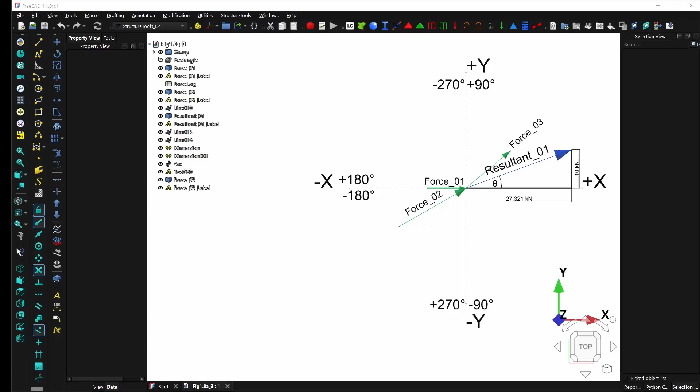It really is quite remarkable the amount of AI power that's available to the average person. The question is, what do you do with it all? You either contribute to something meaningful, like structural mechanics in FreeCAD, or you can turn yourself into the Terminator. I'm happy with my decision, don't judge me.

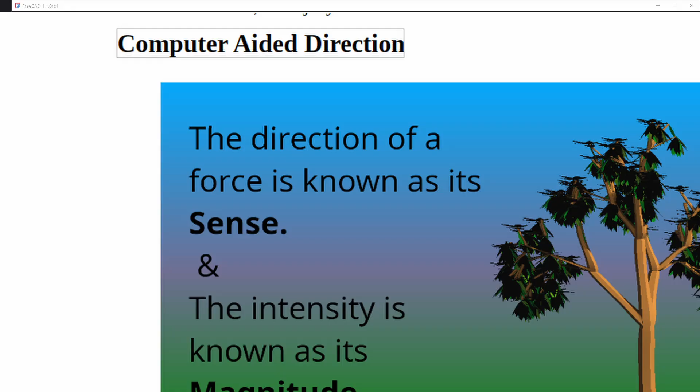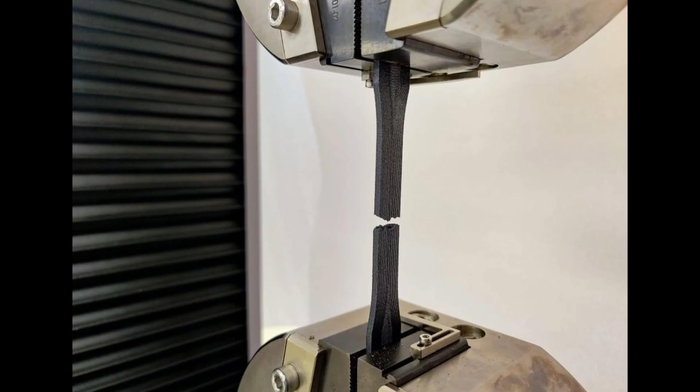Drafting or design? Technically, there's no upstream from design, but guess where the finger of blame lands if something goes wrong? The drafter's knowledge flows from design to manufacturing. So it's very important to be able to design before you accept the CAD position, or have a clear clarification of that 'D' word. We've all been there, right? Yeah, just keep making it stronger till it doesn't break. That's not computer aided design, that's computer aided destruction.

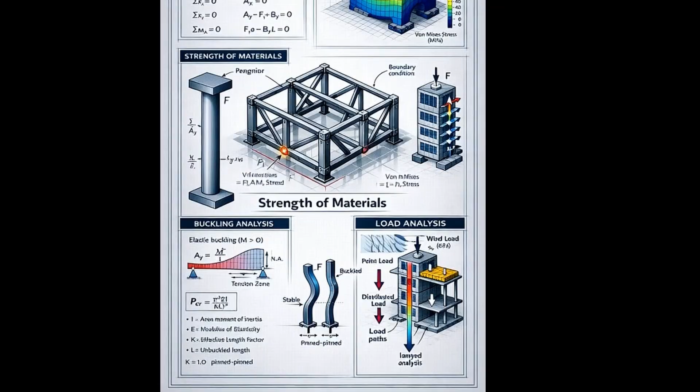When the economy of scale starts to include a risk to human life, or a significant amount of time and money expense for R&D, then a design needs to be implemented. Some people will still say it's form over function, and good luck to those people. Structural mechanics investigates function via a load analysis, the strength of materials, a finite element analysis, a buckling analysis, and Chapter 1: statics.

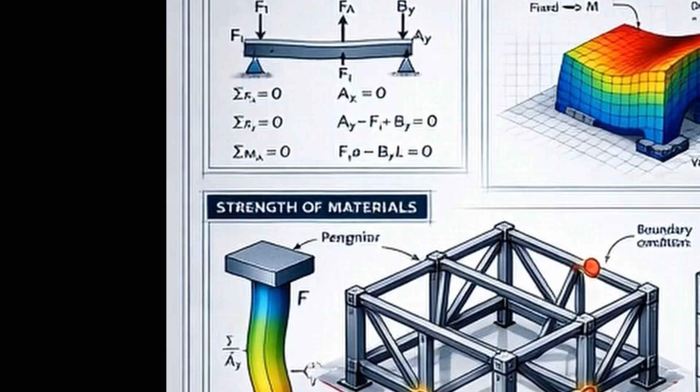When an engineering course starts, there's a 75% dropout rate, and even these lecturers aren't as focused as they should be, as there's good money to be made by betting on who's about to drop out and who's not. And without a decent library on these essential skills, the primary engineering subjects can be a little harder to learn than they should be.

If it's not moving, it's static. If an object is moving, it's dynamic. Typically, buildings are static. So let's go ahead and take a component out of a building, say a truss.

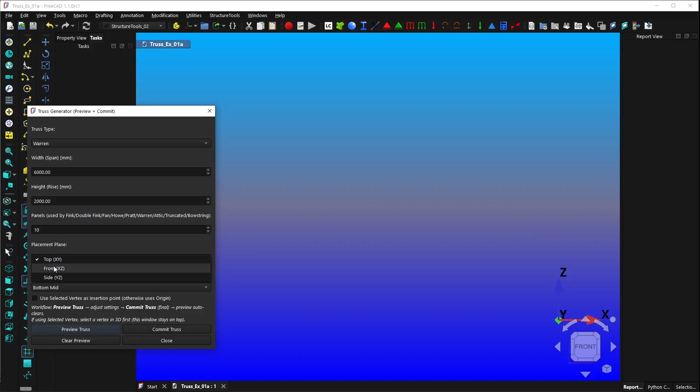With this macro that I've written with the help of AI, there's a list of different types of trusses that you can use. The span we're looking for isn't really that relevant at the moment. Neither is the height, neither is the members. But I do like to put it on the front, so we'll just preview this. Span of so many. Yep, that's better, and we'll commit that.

Close. And the beauty of this for analysis is that when it's drawn, each section or element is individual. There's no continuation between the nodes, and this is important in 2D analysis such as StructureTools.

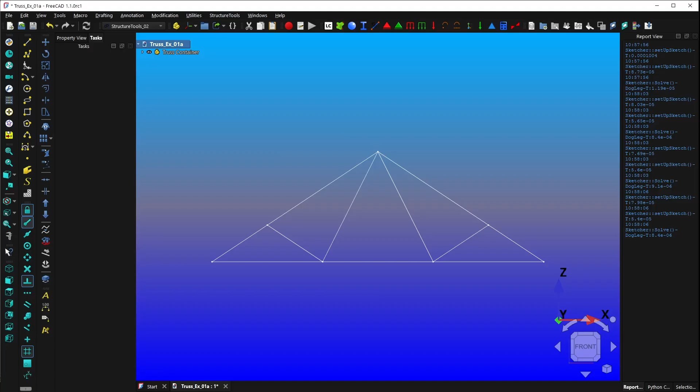Now the first thing we want to do, if we just switch over to - actually, I might just show you the example, it will be easier for me at least. So we have a load of 15 kilonewtons, and we can assume logically that each of the reactions is going to be equal, or spread out over the two places where the truss touches the walls or the supports. But in a case where...

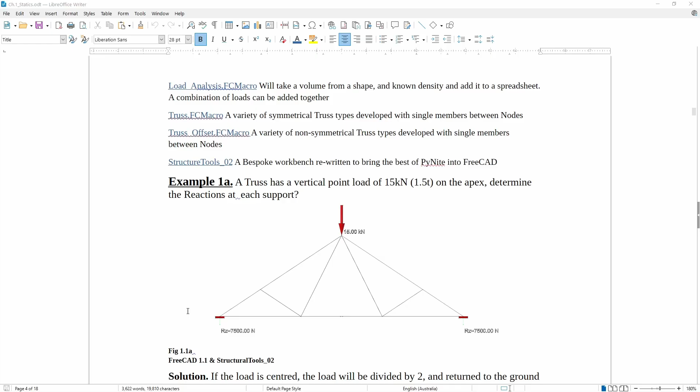a truss might have an offset loading, the reactions will be different. And as you can see from the workings here, you can determine the loading on the support either by proportionality, or a percentage of the load relative to the span. So if this is over 25% of the span, then this will take up 75% of the load, and this one will take up 25% of the load. So it's really quite convenient, but in no way the entirety of the subject of statics.

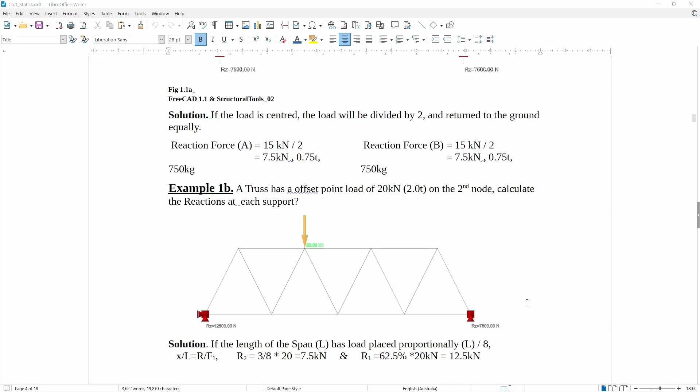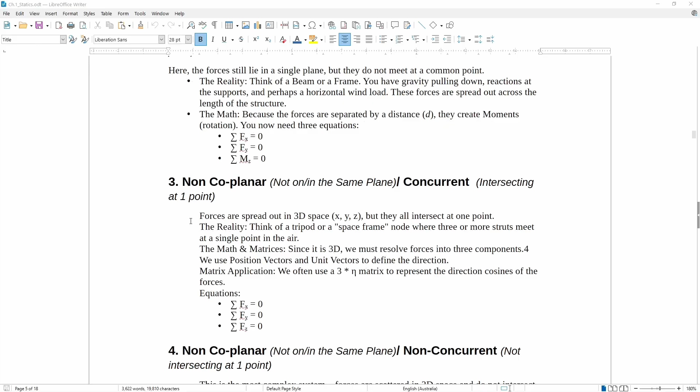It is quite complex, and there are 4 basic force systems: coplanar concurrent, coplanar non-concurrent, and these two are basically software: non-coplanar concurrent, non-coplanar non-concurrent. But without knowing these two in good detail, you really shouldn't be using software in the first place.

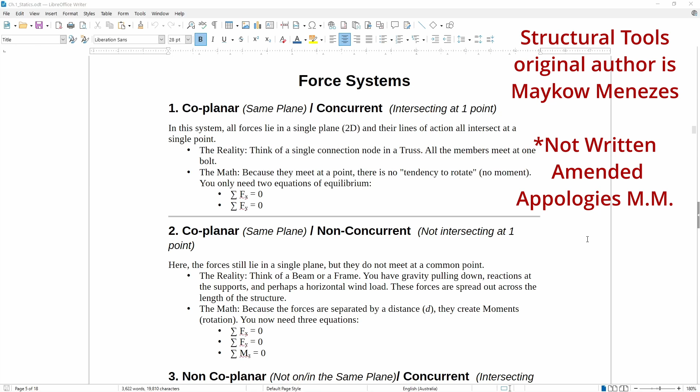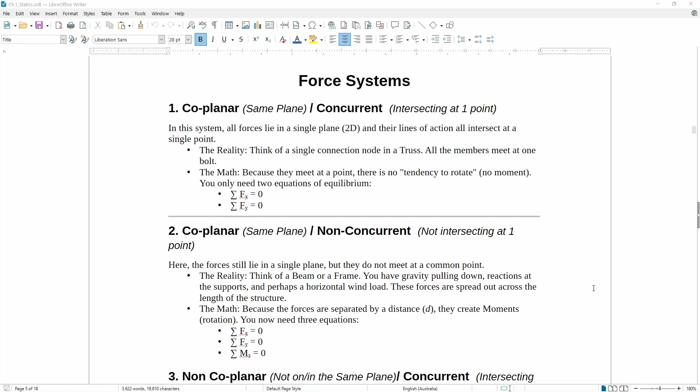So I've simplified this section with another macro, which I'm about to show you. But section 2, coplanar non-concurrent, it's all theory. And yes, StructureTools version 2, the one I've amended, does have the tools to do this kind of work. But should you do it before you've done hand calcs? Because the idea of using software is to confirm your calculations are correct or within ballpark, so you then have some confidence.

Coplanar concurrent force systems are simply a group of forces, so the green ones can be simplified into one force called the resultant, and it has a balancing force. So you can balance all these forces with one force.

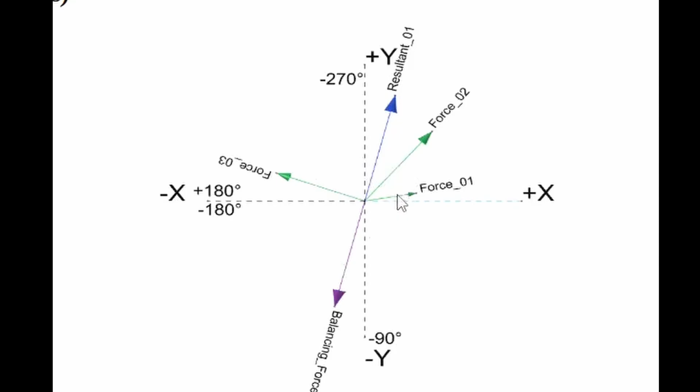I guess it's probably best to show you an example. Here's one I prepared earlier, but I'll switch over to FreeCAD.

Okay, so this is the macro, and if we use these forces, force 1 and put on the front plane, we want 10 kilonewtons, the angle is 45.

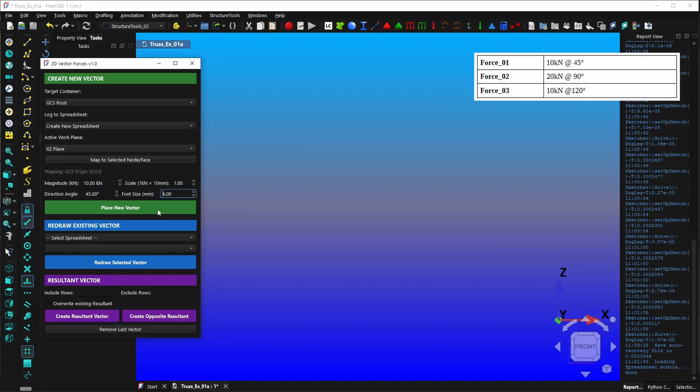Okay, so the scale is 1 kilonewton equals 10 millimeters. The font size, I have no idea, I can't remember. Let's have a look what happens.

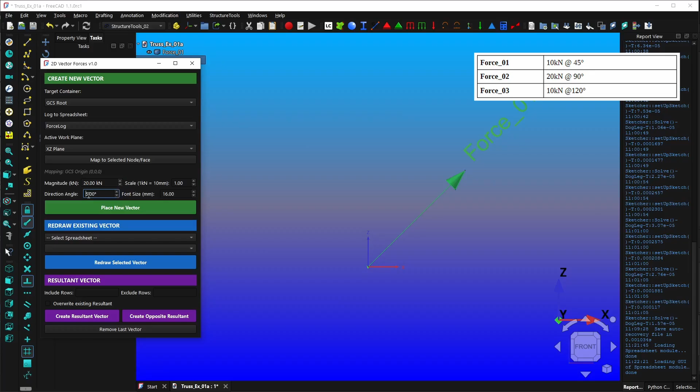Okay, I'll turn on the axes. And the second one is 20 kilonewtons at 90. So, 20, 90. There we go.

The third one is 10 kilonewtons at 120. Alright.

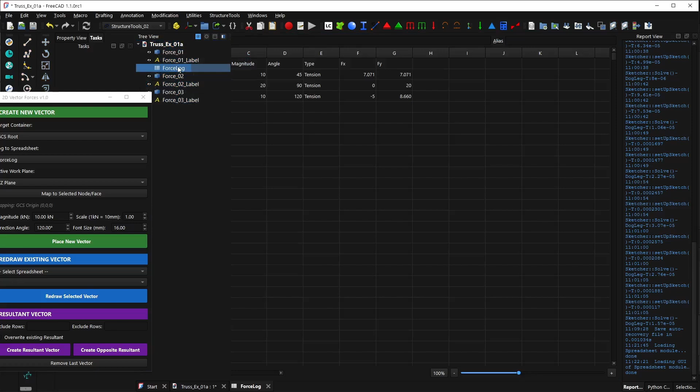And now we also have a spreadsheet. And so we can see the spreadsheet is there with all our forces. And if I zoom out a bit, you can see there's FX and FY there as well.

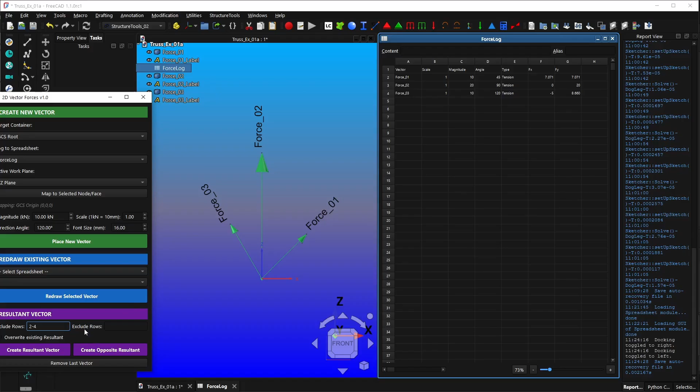Now, to get the resultant vector, we need to know the rows we're working with, 2 to 4. And we have the opportunity to exclude rows. And then we have it. And we can create an opposite resultant as well.

This would have been a lot of trick otherwise. Basically you've got to break it all down into X components, cos and sine, and then to get the resultant you need tan. So yeah, the whole party. But this turns, say, a 20-minute problem into seconds.

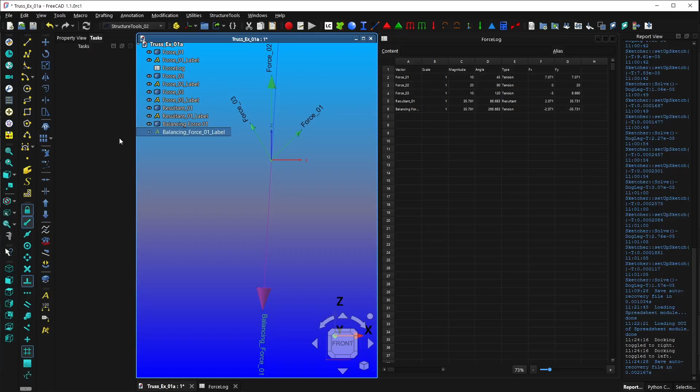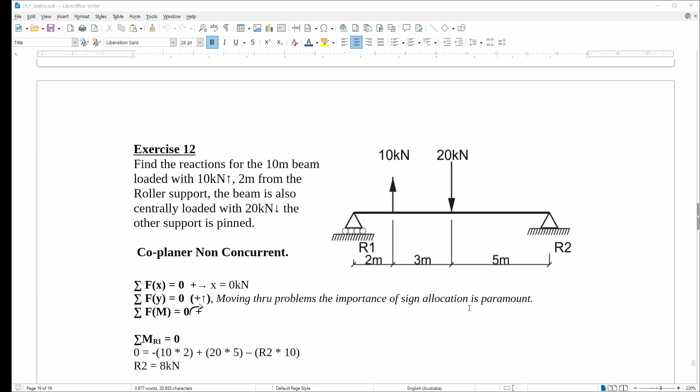So we put all those in brackets. Plus 20 times 5, and then minus R2 because it's going up, times 10. We work out R2 to be 8, and at this point we could use either

equilibrium of forces vertically or take moments about R2. That's a typo. Yeah, so let's change that. Let's fix there. So basically we're doing the same thing in reverse.

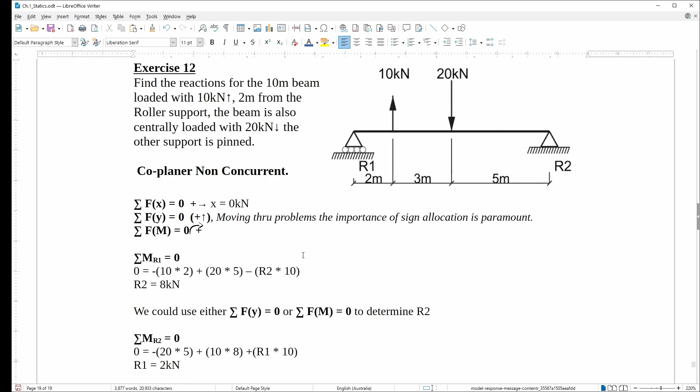Taking moments about R2, we've got 20 times 5. It's going anti-clockwise, so it's minus. Then we've got 10 times 8, which is positive because it's going clockwise. R1 is also positive because it's going clockwise, times 10, and we transpose that equation to get 2 kilonewtons.

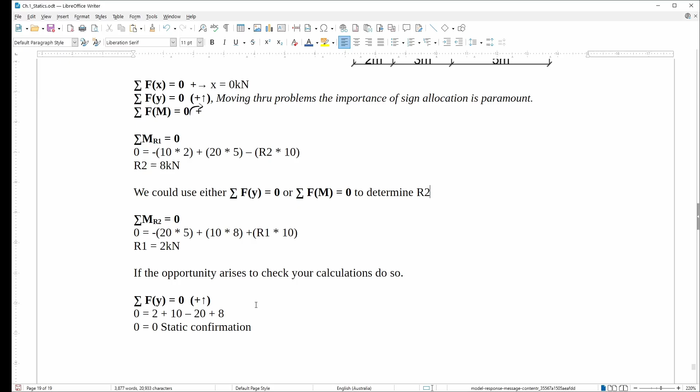And if we just do a double check, the equilibrium of forces vertically, 0 is equal to 0, so it's statically confirmed.

But we take this same problem, remember we got 2 and 8 on each of the reactions, and put it into commercial software. We've got a pin support there and a pin support there. It should really be pinned and rolled, but I don't have access to that. But we can see the difference.

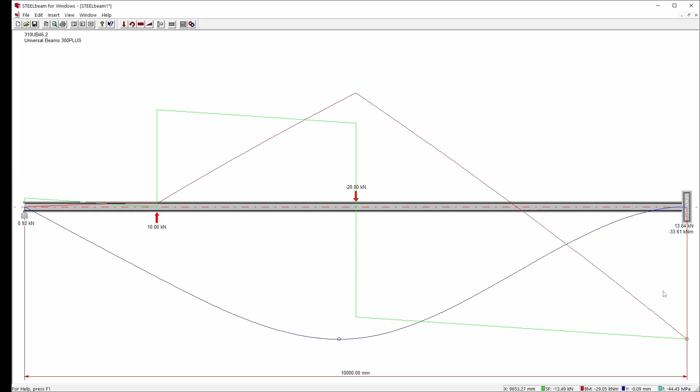10 and 4. Now let's change one of these over to fixed. We've got 13 and less than 1. Okay, so you can notice the difference that the type of support induces onto the system.

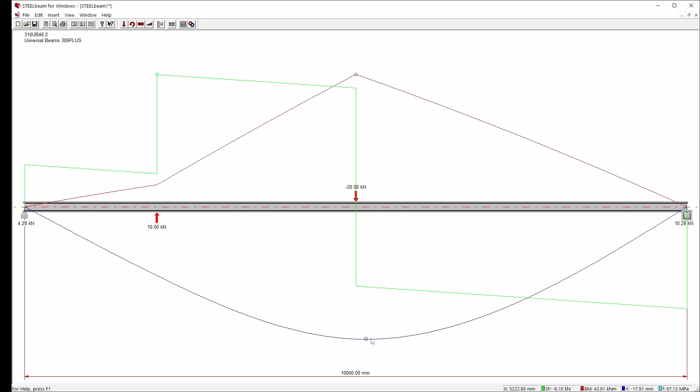I don't have access to Spring in this software, but what I am using it for is to just double check that we're on the right deflection scales, bending moments, etc. So shear forces, bending moments at 44, displacements at 17, bending stress. Okay, so we'll come back to that.

Unfortunately, I drew this at 1 meter, not 10 meters. So I've got to draw another one.

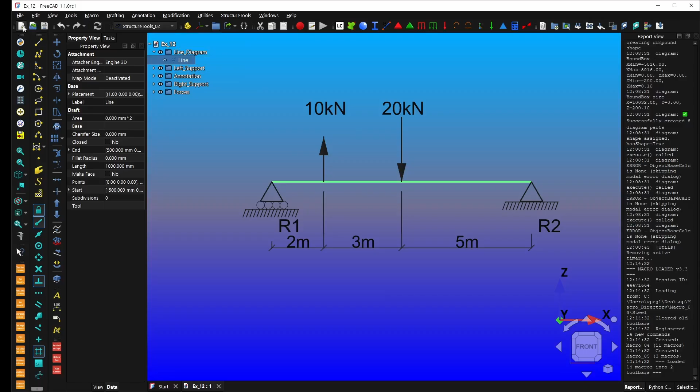If you notice that we're in StructureTools 02, it's been modified from the original StructureTools. I take no credit in all of this. Some of it, yes, but not in all of it.

Okay, so the first thing we need to do to simulate this beam is to get a line, and we'll start that at minus 5,000. Another point. And another point. There we go.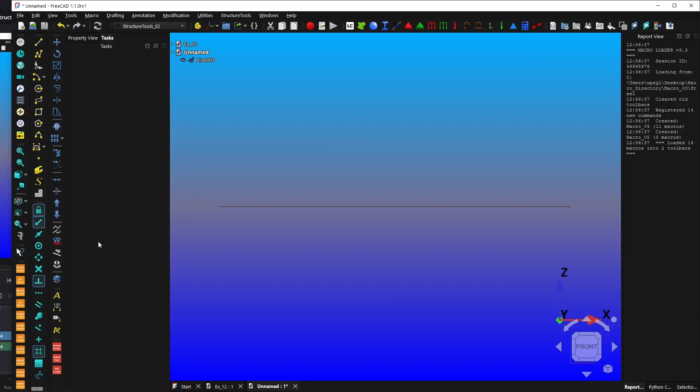Doesn't really need to come over, but now if I open up my Australian steel, part of the steel collection, the I-beams at least, I can now choose from the grade and the available UBs. Okay, let's go with 310UB40.4.

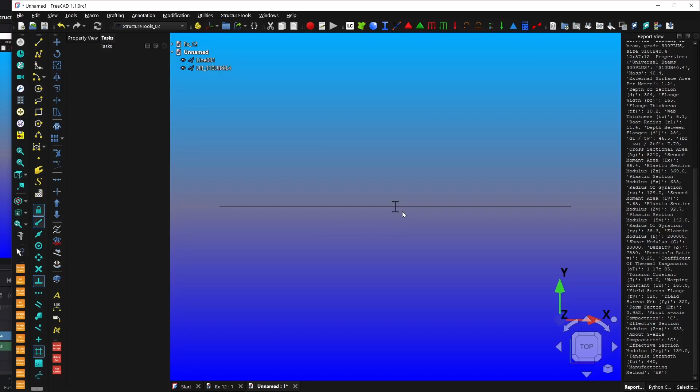Now on the top plane, basically you need a face to assign it to this line, which will become the structural element. That's why I have the shape binder included in the toolbar. You could effectively shape bind a face into the document and then assign it to the element. But we need to assign the section, use that.

So now in the properties, we can check all the values there. Because it doesn't have the fillets, it's not going to be exact, but the numbers are going to be pretty close.

Alright, so we need a material that comes in as steel, and now we can assign the element. You notice in the line section, 4 new properties have dropped in there, and we only need to change 2 of them - the material,

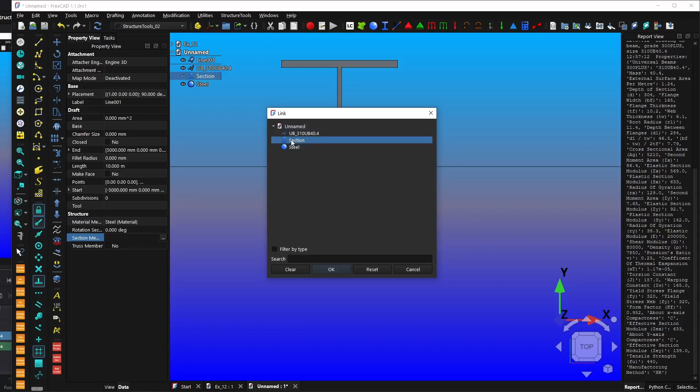and the section. Now if it was a truss member, no bending forces can go into it because the ends are normally pinned. Perhaps for another time. Alright, so we don't need that.

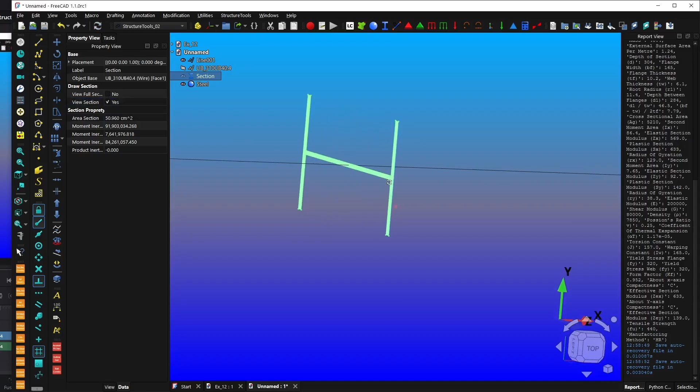We can check it's been assigned properly. We can just view the section, hit F5. That looks good. You also have the full beam there. We don't need either really, because they'll just impinge our progress.

The next step is to have a restraint. That's a node restraint, this one, and this one is a variable restraint. So if I select the element, I can put the restraint anywhere on the beam, which is different to the original version of Structure Tools, where you're restricted to only nodes.

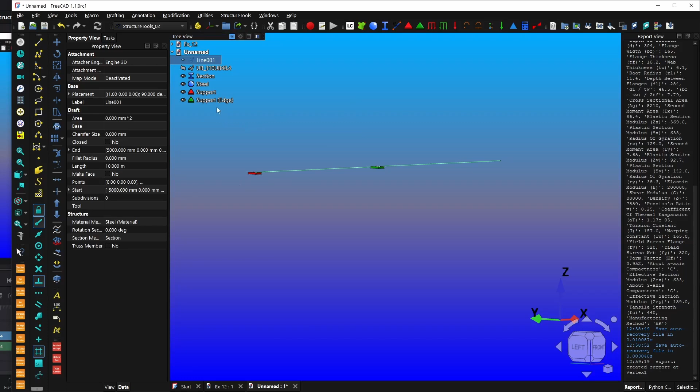And to change this... you get the idea. And you can also change the rotation, translation.

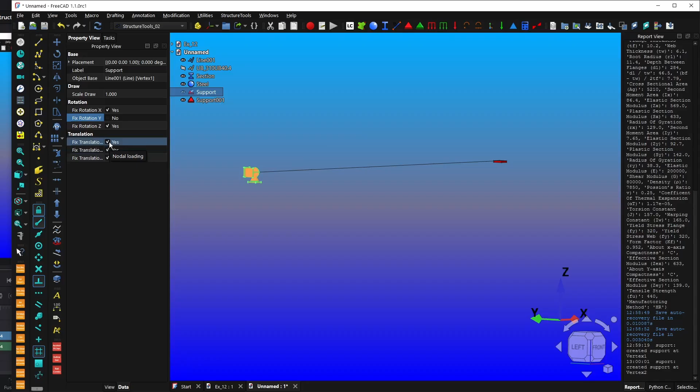But let's delete that. Moving forward, let's put another node there. This one has to be pinned, so I can rotate it in the Y. This one's roller - sorry - and it can transverse in X. That's why it's good to be in the front view.

This one is pinned, so it can rotate in the Y. Alright.

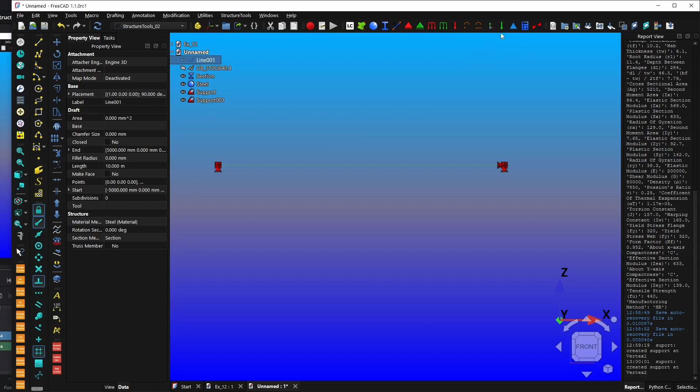In the old version, we were restricted to only point loads on the nodes. Now we can use point loads anywhere on the element. It's already lined up the center, so we'll just change this over to 20.

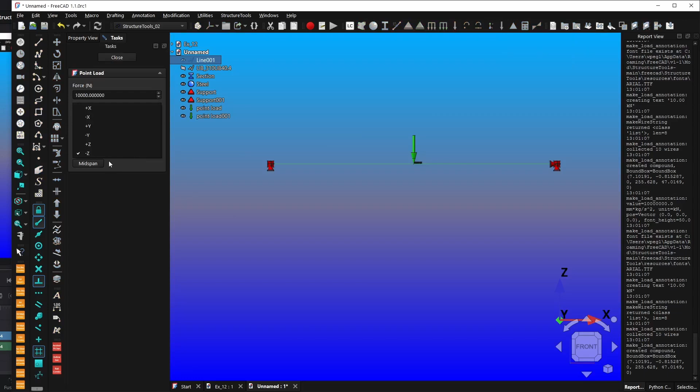Looks good. Perhaps I need to put a commit button on that so you can keep it open while you're putting the data in.

Alright, so there we have it. We should be good to go. The next step: Shift B, make sure you select everything, and hit this button.

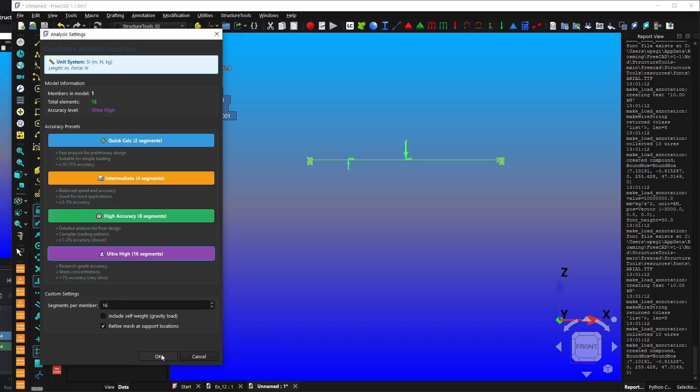We won't include the self weight. I want to see the reactions - that's what I'm interested in, the reactions. Then we run the analysis. Cross our fingers. Completed successfully.

Okay, and now we want to open up a diagram. The calc selected. Well, that's pretty close. Well, that's a home run.

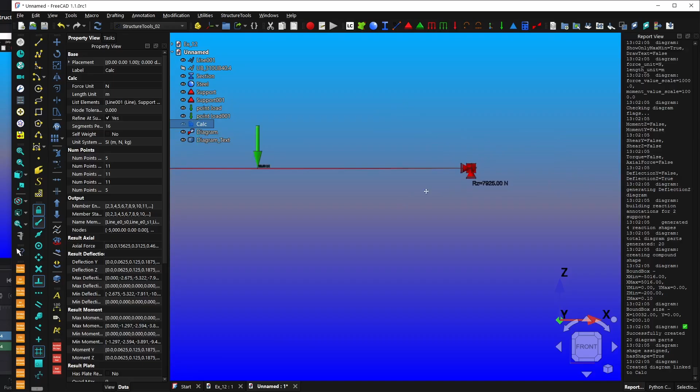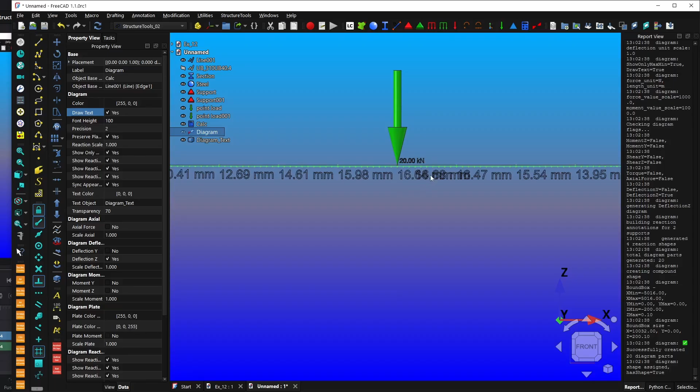In structural mechanics, that's a home run. Okay. In the diagram, what I will show you though, the text - if you remember, we got 17. We're now at 16.6. So also another home run.

45 was the bending moment. Bending moment. We want this guy.

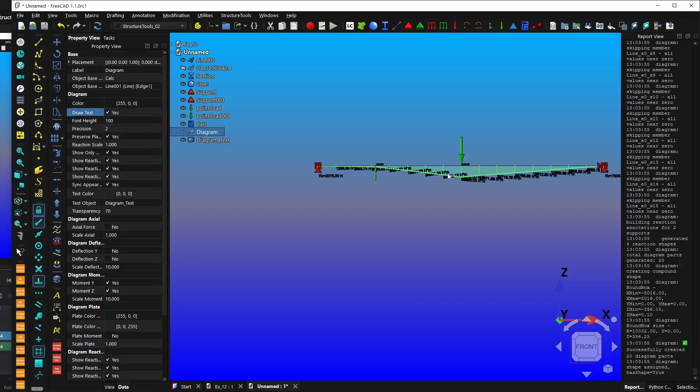39 kilonewtons. So in this instance, I'd probably be looking back at hand calc. 39 and 45 - what's that? 6 kilonewtons. 6 divided by 45 is 13%.

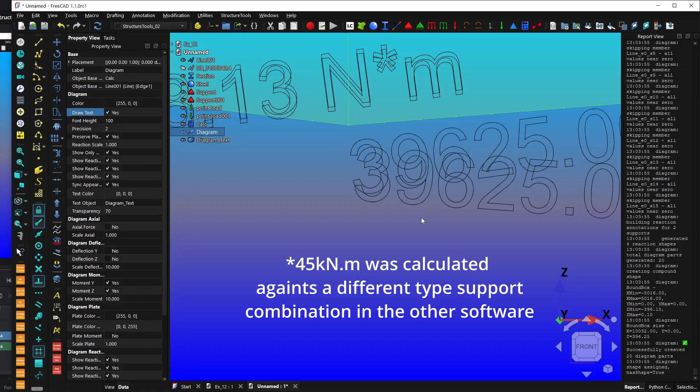Probably a bit more than what I'd be comfortable with. I would want to try and keep my percentage error as low as possible, but that's why we have safety factors.

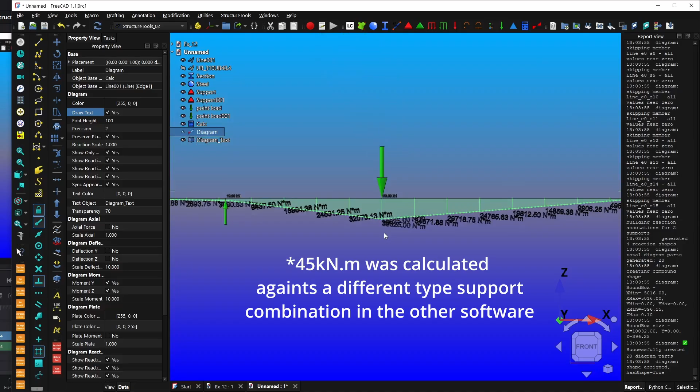But they're not extremely off, you know what I mean? I mean, that is a home run, in my opinion. And I will be testing the rest of my course notes against this and debugging it before it goes up for sale and published on YouTube.